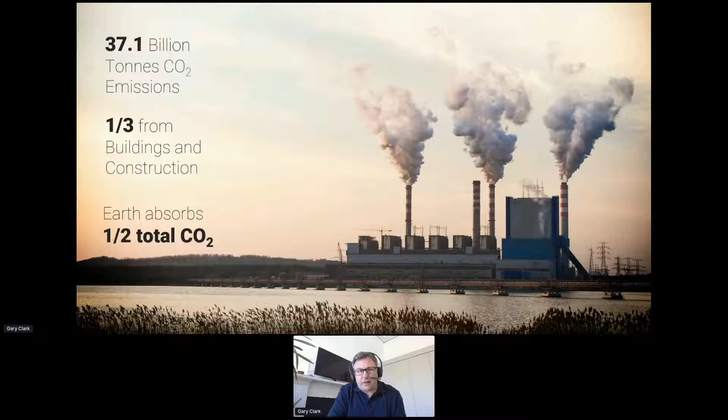The net result is the future. We've got two paths. The path to the right is a future with about 8 degrees Fahrenheit change, that's about 4 degrees centigrade. We can see the impacts of a 1.1 degree temperature change on climate events - things that happened every 100 years are now happening regularly.

So we've got to do something about it, as we know. If we go as fast as a 2% reduction per year for the next 30 years, then hopefully we can achieve that 2 degree temperature increase - this is to the left. And if we go faster this next 10 years, then we can maybe achieve the limit of 1.5 degrees.

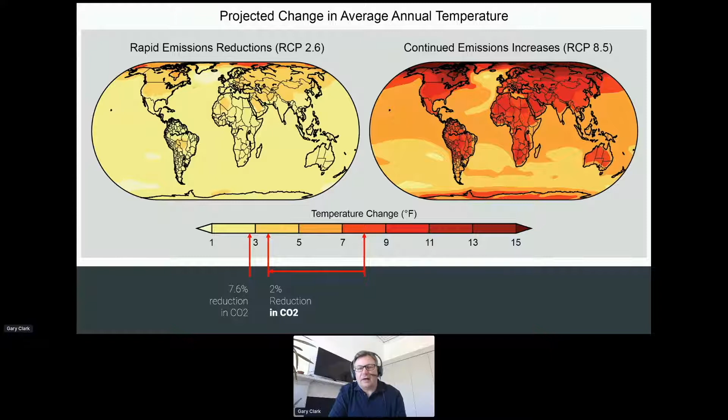Let's see how we can do that. Now, as chair of the RIBA Sustainable Future Group, I've been active in editing and writing these guides. The first one we're going to go through is the RIBA Sustainable Outcomes, which feeds into the 2030 challenge, and all that feeds into the plan of work, which was released last year. We've got a new guide released last month, the Plan for Use Guide.

All these guides link back to the UN Sustainable Development Goals, all 17, and we can see them all here. It's important to stress that all 17 are absolutely important and we should consider those in whatever we do. But at the RIBA we've split these into two parts - we've initially focused on the environmental sustainability issues, which we can see here. There's going to be a new report from the RIBA released later this year on the ethical side of sustainability, so just to make you aware that's still coming through.

That 10 has been distilled down into 8 sustainable outcomes, and these are the ones I'm going to touch on briefly, just going around this circle.

So the first one is net zero operational carbon, which is our key target. This is measured in kilowatt hours per square meter. There's no shortage of energy hitting us, it's from the sun. The problem is, how do we capture and how do we store it? These are the key principles we're asking architects, designers, and specifiers to follow.

The first thing, and you'll see this a lot, is that we can't solve the problem by building just new buildings. We've got to retrofit what we have. We've got 45 million buildings in existence in the UK, and some of the most poorly performing stock in Europe. So whether we're retrofitting or building new, fabric first is really what we're asking people to do, focusing on the external envelope of the building and making sure it's airtight and highly insulated. Then we integrate regenerative engineering.

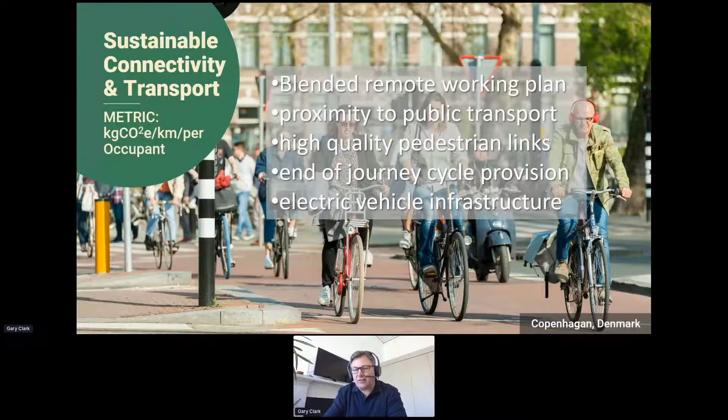Think about the end of journey experience for our commuters, and really try to get everybody to move away from cars. And then the final thing is thinking about electric vehicles—we can't solve the problem if we all just buy Teslas. That's the last thing we should think about.

Next one is sustainable land use and ecology. This is really the same thing again, retrofit, but from a brownfield site. There's so much previously developed land that we've got to make a priority, and we're lobbying government for that. The principle is to leave the site with better ecology, and we're asking for a 20% net increase in biodiversity as a minimum for all new projects, aligning with the London plan.

At the same time, creating productive food landscapes, as you can see with the children here. Next one is good health and well-being, again absolutely topical at the moment. This is a restaurant in St. James Park, which I designed when I was at Hopkins, and it really sums up the principles: contact outside, contact with nature, creating that appropriate density for when we return to work.

Indoor air quality is absolutely now top of the agenda. We understand we're slowly killing ourselves in our buildings if we don't get that right. Good lighting, good adaptive thermal comfort, acoustics, and obviously inclusivity as well.

But we've got to go beyond the buildings. We've got to think and remember that we are actually creating places for people and communities. We're building communities. Granary Square at King's Cross is, for me, one of the best new squares in London in my lifetime, and it's a joy to be in.

These basic principles of urban design are really at the core here. It's creating mixed use and tenure, really changing the idea of zoning. We've got to create identity and territory, creating secure but yet social spaces. And it's all about that permeability and high quality pedestrian links to encourage people to feel safe in our cities.

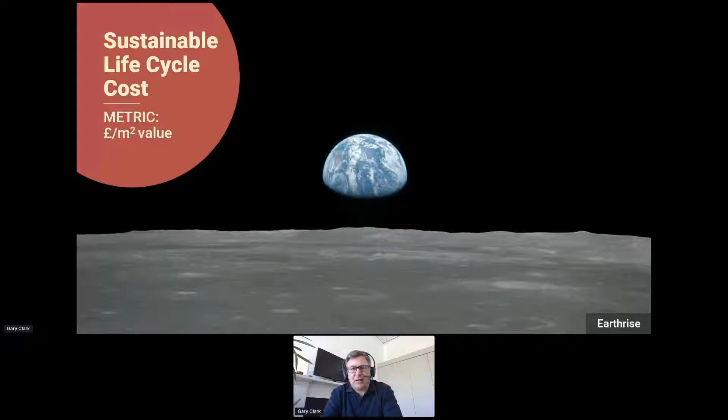And the final thing is in terms of life cycle cost, and this is really debunking a myth, and this is really the focus - I'm sure it's going to be in the chat as well. We've got to live on the interest of the planet and not its capital, and that follows through into our buildings as well.

So we've got to balance - we've got to look at the whole life analysis. We've got to balance the energy costs, the capital costs of materials, but also the operational costs. The more complex we make our buildings, the more money it takes to run them.

So we've got to look at that balance in the costs with the added value - the added value of health and well-being that we create for our occupants, and also the social value of our developments. If you balance that, hopefully the added value outweighs that, and then you get that return on your investment - that's really what we're looking for from our buildings going forward.

So that's all the outcomes. And then really in the plan of work, this is a diagram of how we actually see this kind of working.

Really setting your outcomes at the beginning with your client. If you're a designer, if you're a client, this is what you're asking your architects to do. And the sustainable outcomes is really just a starter for ten - it's just to give you an idea in terms of the key outcomes and maybe some of the key metrics. There's about 25 metrics within the outcomes.

You set these at the beginning of the process, stage 0 and 1. And then we're integrating that into the design in stages 2 and 3. And then we flip into a kind of reality checking and testing, validation role within stages 4 and 5, when we hand over to the contractor.

But crucially, this is the thing - the new plan of work is really changing and defining how we hand over the building and how we gather that feedback. Now, feedback has been part of the plan of work for 60 years, but it's been very seldom used on a regular basis from our design teams, and we're going to change that.

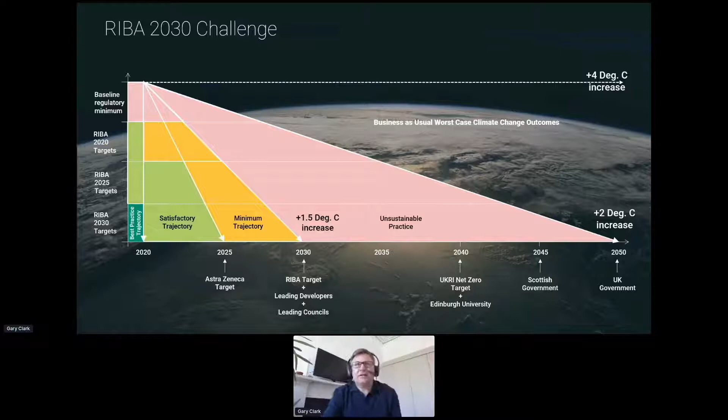Now, going into the targets, I'm not going to go into too much detail, but basically it comes down to 4 of our sustainable outcomes we focused on. First one is operational energy, and we can see there we've used current benchmarks, and what we're saying is we're just reducing a percentage at a time, so it's a top-down calculation. At 2025, it would be a 50% reduction based on benchmarks, this is for domestic, and at 2030, it would be a 75% reduction, allowing people to then offset that final 25%.

And we think this is going to be doable within a domestic situation. Embodied carbon, similar principle there, it's about 70% reduction from 1,000 kilograms CO2 per meter squared to about 300. So we can see that, and again same thing there, we think it is challenging but it's doable. Potable water use, it's a 40% reduction, and that aligns with that final step in 2030, which is actually rainwater storage and reuse.

And then we can't create any unintended consequences. Hence we've really highlighted that health metrics are absolutely critical there, and we can see we've got overheating in terms of, that should be CIBSE TM52, sorry, which is the adaptive comfort strategy. We've got daylighting levels, we've got CO2 levels as well, we've got total VOCs, which is becoming obviously important in terms of indoor air quality. We understand the cocktail effect there, and formaldehyde is included too, so you can see some of the references. We're not reinventing the wheel, we're not adding new targets, we're just taking from current best practice around the industry. These targets will be revised later this year in terms of being more sectorized, but I think the domestic ones are a good starting point.

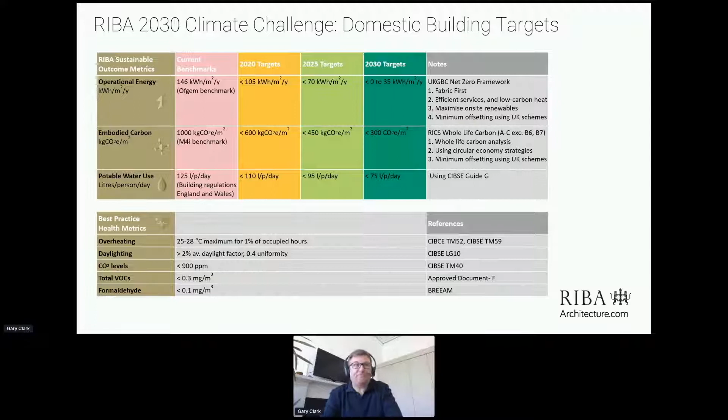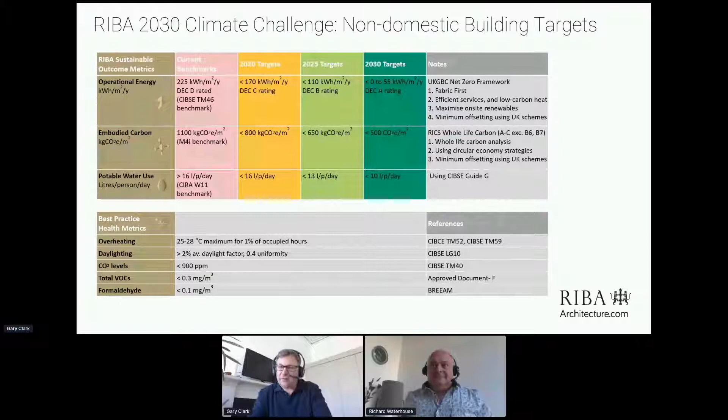Moving to non-domestic, we can see here slightly different benchmarks. We can see a DEC D rated, this is the average. The reason we've done that is obviously non-domestic buildings have long spans, and therefore the embodied carbon will inevitably include some sort of steelwork or maybe some concrete in there. So hence that's why it's 50%, and that's before offsetting. Potable water use, you can see there it's a 40% reduction, and this health metrics as well.

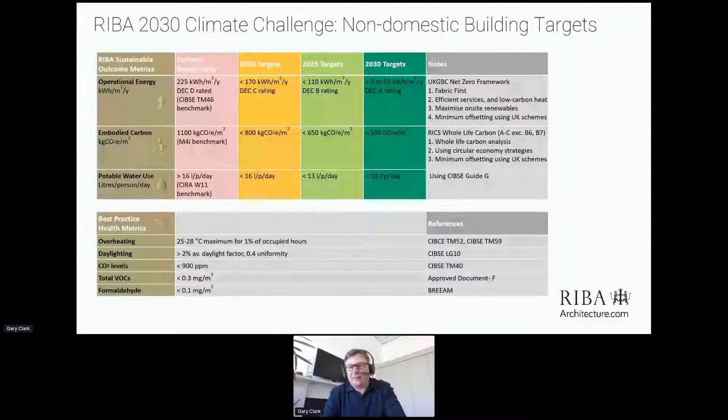So as I said, this perhaps is the amount of information on the internet, there's just so much there, and I think it adds to the confusion. So what we've been trying to do this last year in terms of lockdown is actually work really closely with all the key grassroots organisations and other professional bodies in the UK to actually speak with one voice. And really we've done an enormous amount of work. So we can see here that, with UKGBC and working very closely with LETI, all of these targets I've just given you are actually all aligned.

And so really I think that wherever you come in, if you come in through the RIBA or through any of these organisations, you will come to the same conclusion. And that's really important, that we speak with one voice to all of you to make sure there's no confusion.

So as I said, the whole future here is this whole life carbon, and really the combination, as we see there, is the operational carbon, which is building energy use, and then you take off on-site renewables, and then you offset that. Then you add the embodied carbon replacement, in terms of updating or replacing the kit, and then you offset as one together. That is the whole life carbon, and that's it.

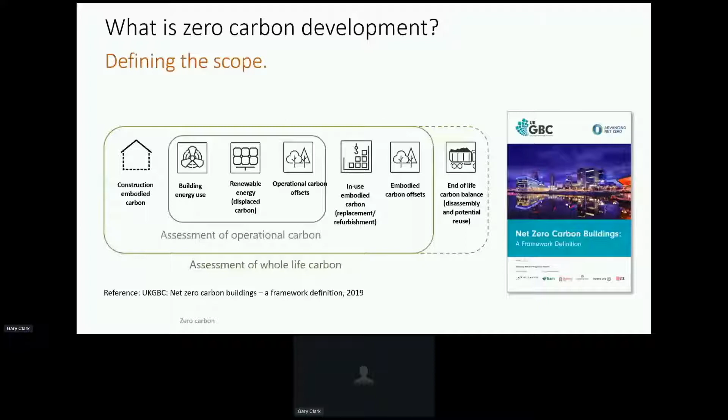We've all referenced the UKGBC, and there's a great piece of work ongoing just now which is going to create the timeline and the new benchmarks for that, but that's going to come out later this year. And in terms of actually assessing how we do this, we can see here that we've got a range of things, ranging from poor accuracy to good accuracy.

Now, what we're saying to government, and it's not just us, it's many of our peers and professional bodies as well, is that we've been urging government to ditch SAP and SBEM and move to a measurement and verification system, starting with passive house but moving up to TM54 for larger buildings, and the Better Building Partnership's design for performance. That's actually where we can more accurately predict how buildings will actually use energy in operation. So really it's a move that government—we're trying hard.

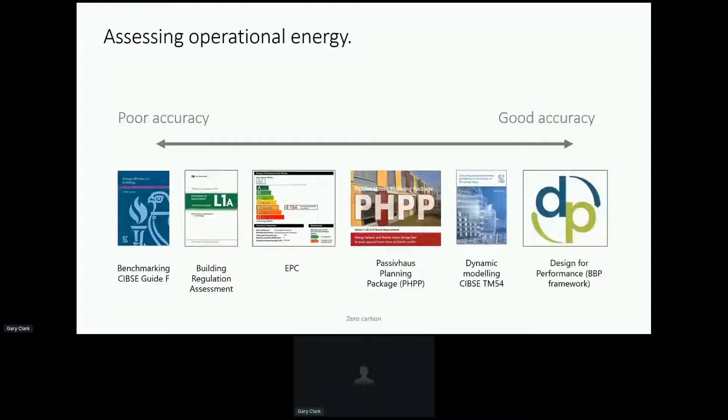We've written an open letter, as hopefully you've seen, 20 organisations have written that, and we'll see how we get on, but ultimately we need to go faster. The government are kicking the can along to 2025, and we think that's too late.

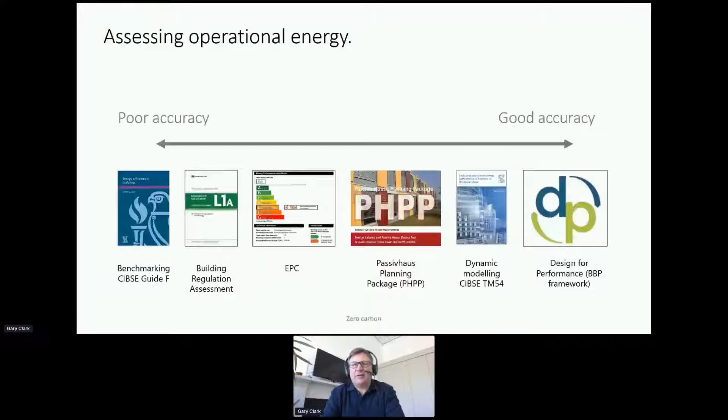So how do we do this whole life carbon now? What is important in terms of the balance of operation and embodied carbon? Now, we've resisted, in terms of the RIBA, creating a single metric, because it's important that over the next few years we understand the dynamics and the interrelationship between operation and embodied carbon.

So this is a typical home. This is just a little calculation I did using the 2030 challenge targets—a 100 square metre building, say GIA. We've used a 30-year lifespan because, by 2050, our grid should be decarbonised, so after that point it is technically operational net zero. But obviously we've still got a long way to go there. The carbon factor of electricity is actually tumbling down because of our renewables just now, and we can see it's roughly about the same as gas, about 0.2.

So that's the basis of the study, and just using the 2030 challenge, we can see: at the 2020 target, the operational carbon is marginally more than the embodied, but not much—it's almost 50-50. But that flips when you reduce the operational carbon down faster than the embodied. We can see at 2025 the embodied carbon target starts to take over, and then finally at the 2030 target we've really attacked the operational side of things, so the embodied is more than the operational.

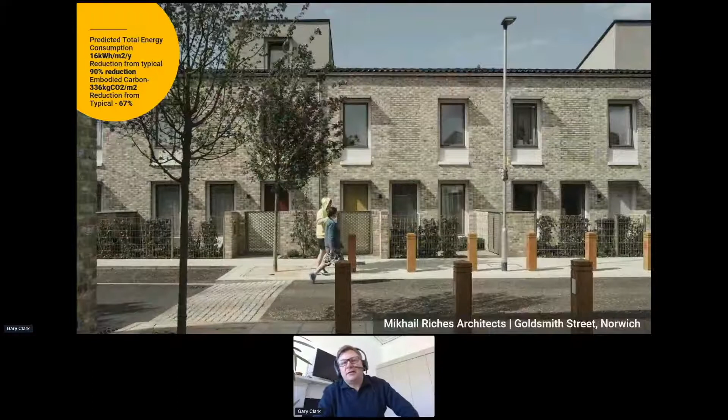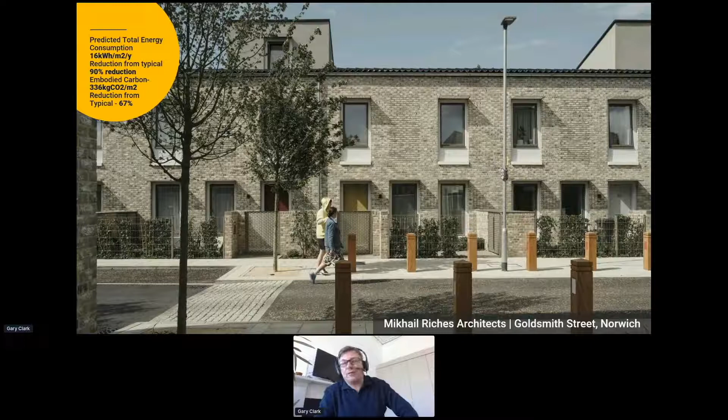So this is the 2019 Stirling Prize winning scheme, Mikhail Riches' fantastic scheme. I had the opportunity to visit when judging. We can see that's a passive house scheme with no renewables, no PV on this. It hits our 2030 challenge both on operation and almost on embodied carbon, without really trying. This is post-match analysis - it was done for £180 a square foot construction cost, which shows that with scale and economy of scale, we think we can do this.